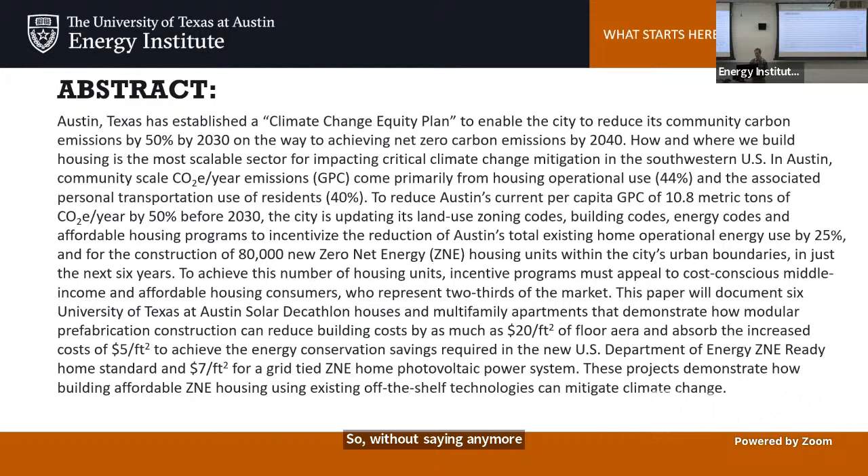Thank you, thank you. It's a pleasure to be here, and thank you for coming on a beautiful day. Let me figure out how to use this... clicking the screen first, maybe... okay, we'll just start.

To start with, I think everyone's seen the IPCC graphs showing there's a 99% chance that man-made carbon emissions have led to our current condition of dangerous climate change. The IPCC says that at the current rate we're going, we're not going to make the Paris Climate Accord goal of keeping the global temperature rise below 2 degrees Celsius by 2050. That's bad news—we're not making enough progress. We're making great progress in the United States and much of the Western world, but many developing countries are starting to industrialize, so the actual amount of carbon emitted into the air every year is increasing, not decreasing.

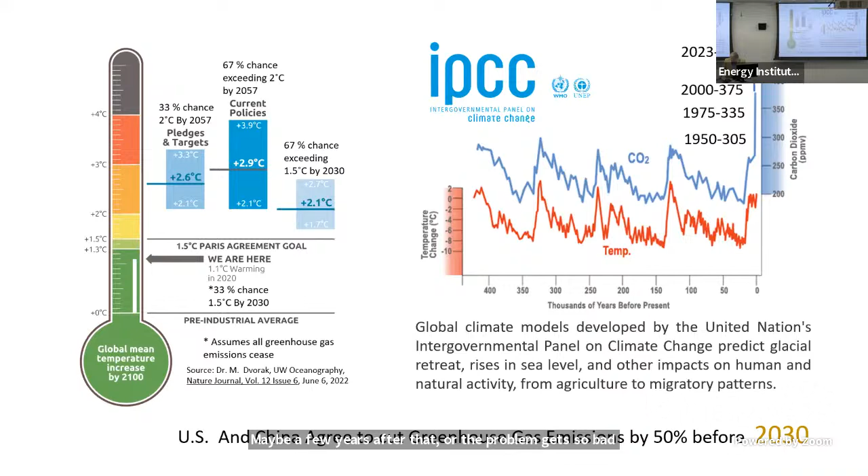So we have these problems. We may not make it by 2050 to stay under 2 degrees Celsius, but as Winston Churchill said, you can count on Americans to do the right thing after they've tried everything else. In that vein, we'll probably be looking at more like a 3 degree Celsius rise by 2050, or maybe a few years after that, before the problem gets so bad that we actually begin to do something about it. The implications of that are quite profound.

By that time we'd begin to see average summertime temperatures in Austin, Texas—currently about 96 degrees—rise to more like 110. We'd also see projected coastal flooding in some of our more beloved beach areas, like Port Aransas and Galveston.

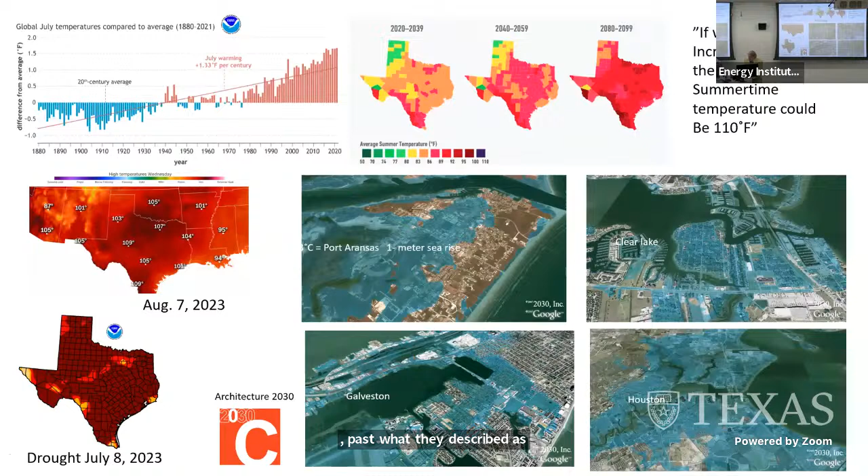To compensate for that, the City of Austin has passed what they describe as the Climate Equity Plan. This plan looks for Austin to become a zero net emissions community by 2040. We're a very rich, progressive, green, and highly educated city—if we can't lead the way, who can? Looking at their chart, we can already see we've made great progress, though a lot of that had to do with COVID.

So the average person in Austin is generating about 10.8 metric tons of carbon emissions per year. We can compare that to other locations. In Germany, that number is 9 and dropping. In France, it's 4. And for us to actually mitigate climate change, we would have to get that number down

to about 2.5, which is basically what you find in most of the countries in East Africa. So those are daunting goals. And to make a change of this magnitude, we would need lots of numbers. You can't just have 1 or 2 green buildings, 1 or 2 zero net energy buildings.

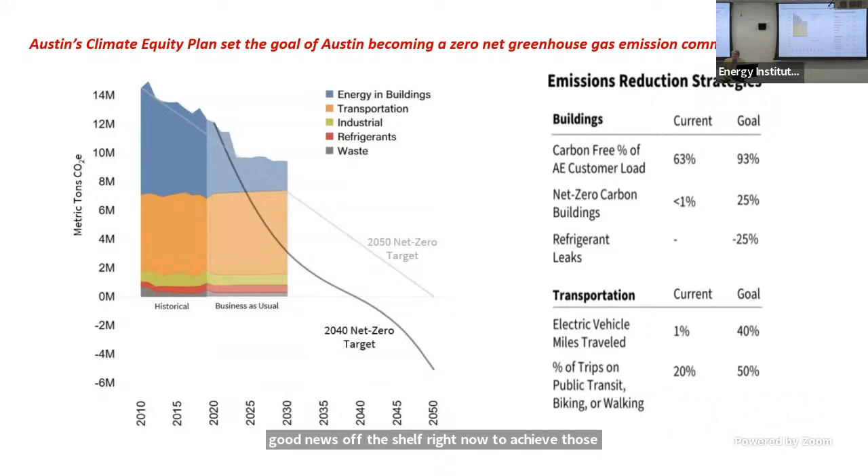That's the goal. That's a very ambitious goal. Some would say an impossible goal, given where we are. The good news is we have the technology off the shelf right now to achieve those goals. We don't have to invent anything new, we just have to have the wherewithal to do it.

The biggest thing to take away is to actually see where we're generating those carbon emissions here in Austin. It turns out 84% of it is basically a policy on where we build housing and how we build it.

84% of our carbon emissions come from the operational use of housing and the transportation associated with that housing. Suburban housing has more surface area than apartments, and we have, in terms of dwelling units, slightly more apartments than houses in Austin, but it's pretty close. We have about 467,000 housing units, and we're adding anywhere from 20 to 40,000 new units a year.

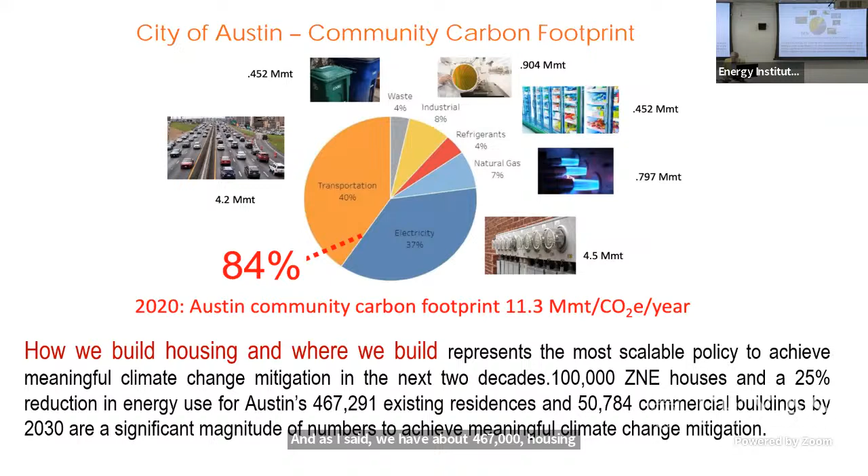So how do we do this? How do we go after this goal? Well, to actually get the numbers, you have to address the three legs of sustainability.

One, zero net energy. Turns out that's the easiest one to do. Just using off-the-shelf technology, we can do that. Making it affordable is the problem.

Because if we don't make it affordable, we don't reach the moderate and affordable housing market, which is two-thirds of the market. So what we have to do now is move this from the luxury market, where you might see a few zero net energy buildings, into the affordable and moderate income housing market. And then we have to make that compatible with existing neighborhoods so they will accept the number of multifamily units we're proposing to reach this zero net energy goal.

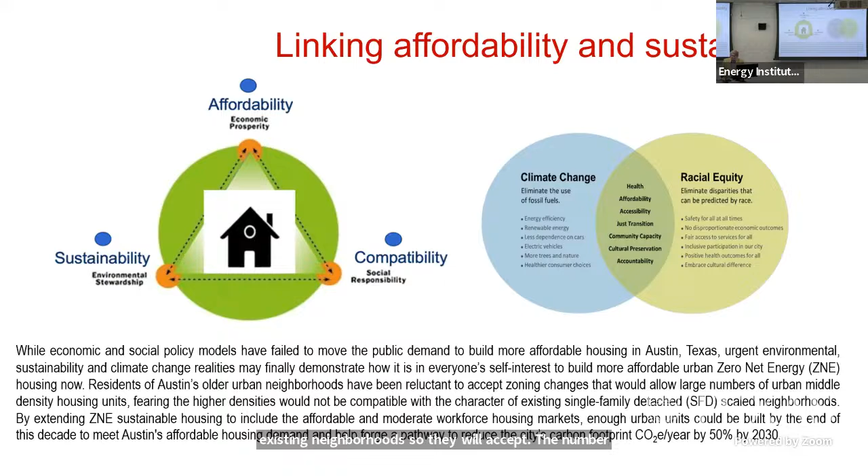Those are daunting tasks, so let's start with them. First of all, it's relatively easy to get to zero net energy, and the way you do that is to begin using the new EPA and DOE zero code. So we start with the energy code, the IECC, the International Energy Conservation Code.

And that sets the minimum R values for our walls and ceilings. It sets infiltration load, it sets the minimum U value for windows, these kinds of things. So that's code. To do Energy Star buildings, we're reducing that by about 45%.

So that's the first level. The second one is that we start making buildings much more airtight. Right now we're looking at maybe 4 air changes an hour in a typical residential building. That's pretty shoddy construction. We've got to get that down to somewhere around at least 1 air change per hour. So we're going to build buildings more airtight.

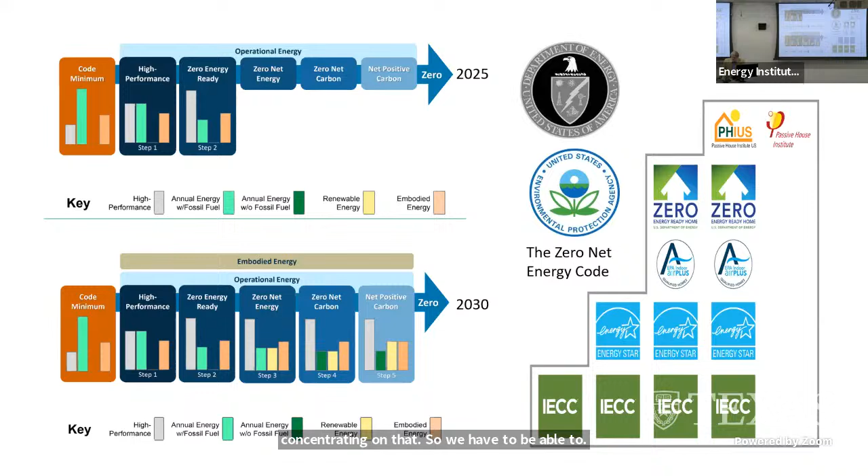And that's where we came in. So the first thing we looked at is prefabrication. Why are we building houses by hand, one by one, like we did 100 years ago? We're one of the last industries to actually industrialize, to be able to use some kind of prefabrication.

Over the years, we started in 2002. This was our first Solar Decathlon house on the National Mall. We did this in conjunction with the Center for Maximum Potential Building Systems. We built it here in Austin, took it apart and transported it to the Mall, had it in operation for a week, then took it down and brought it back to Austin, where it still exists.

So when we're looking at a project like this, we were not only zero net energy, we were trying to be annual water neutral. And we started looking at embodied carbon energy, which isn't being considered right now by very many people. But I would tell you, by 2050, half of the energy a building uses is in the embodied energy required to make the materials to build that building. So we have to address that.

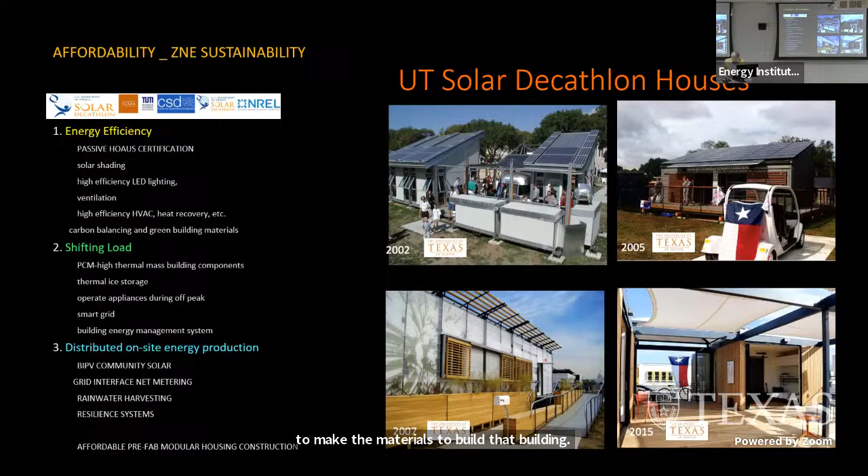We started out trying to do something like IKEA does, where we have a kit of parts that we would make and then assemble on the Mall through a series of, some assembly required.

So we were looking at trying to get some things recycled. We went and bought six recycled junk cars, basically, and took them to Seguin, Texas, had them made into light gauge steel. So there was some upcycling of that.

We also worked with the Airstream company to sort of redo their Airstream. We got one, completely gutted it, and rebuilt it from the inside out. That became our kitchen and bathroom for the project.

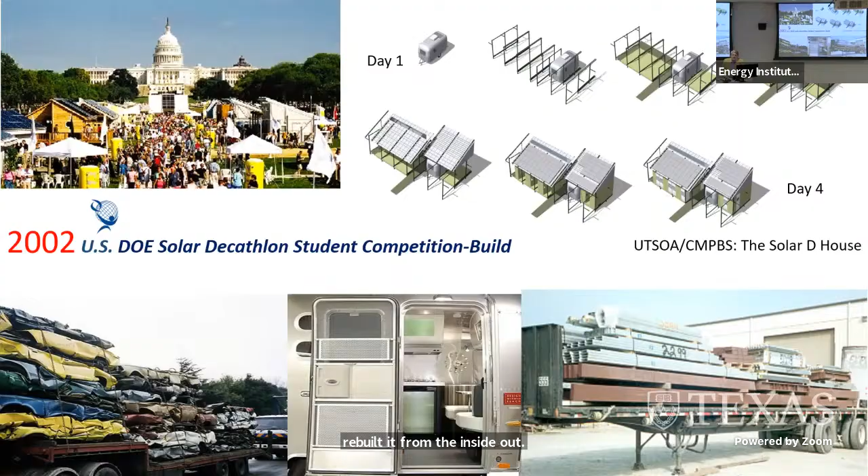And we couldn't use a crane on the Mall at the first competition, so we used the old Roman idea of a block and tackle, using unistruts to put things together, and then we'd use those to raise the roof up into place. You can see the students doing that here.

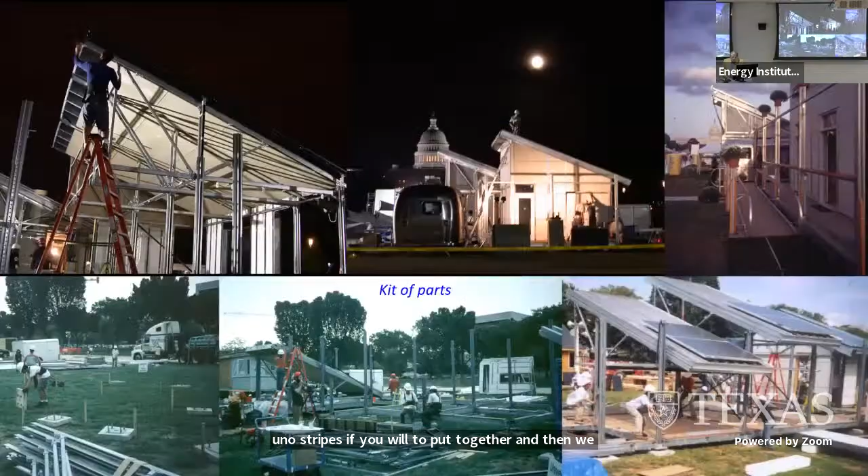So this is us on the Mall. You can see the boxes that we would bring off the truck, and then some assembly required. Yes, it took us like four days, day and night, working around the clock to get this thing together.

And when we finished, more people came through that project in the week we were there than attended the UT Oklahoma football game that year. So it's really highly interesting—the public's highly interested. In fact, the Solar Decathlon is the largest public relations event that the Department of Energy holds.

That's now worldwide. But in this case, we were looking at a 3.5 kW system. We tried to limit it to make it affordable. What you see in those white boxes are the water tanks—we have gray water, black water, and potable water.

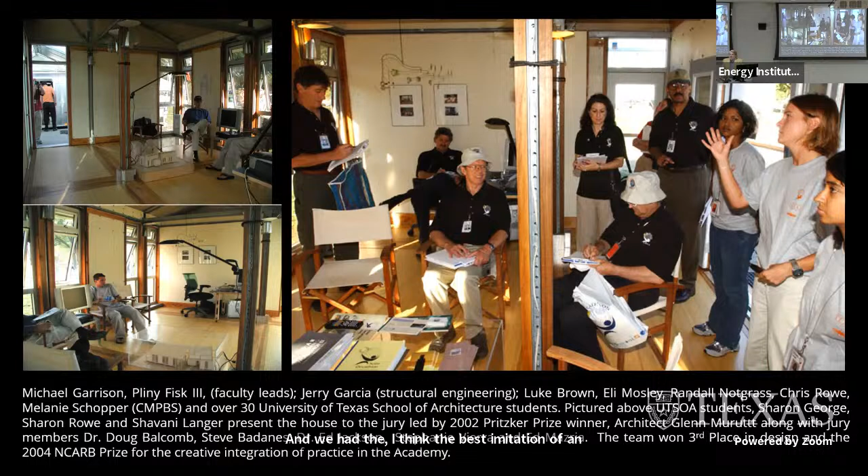And we had, I think, the best imitation of an engineer by an architect in our system. We were using a small fan coil unit with hot water from these evacuated tube hot water collectors, which were also acting as a shading device over our kitchen and bathroom area.

So we were great—we finished third in design in this competition, but there were problems. And this is talk about a tough jury: that's Glenn Murcutt, the Pritzker Prize-winning architect, Ed Mazria, Dr. Doug Balcomb, head of the Los Alamos Passive Solar Energy program, and Barry Jackson, head of AIA.

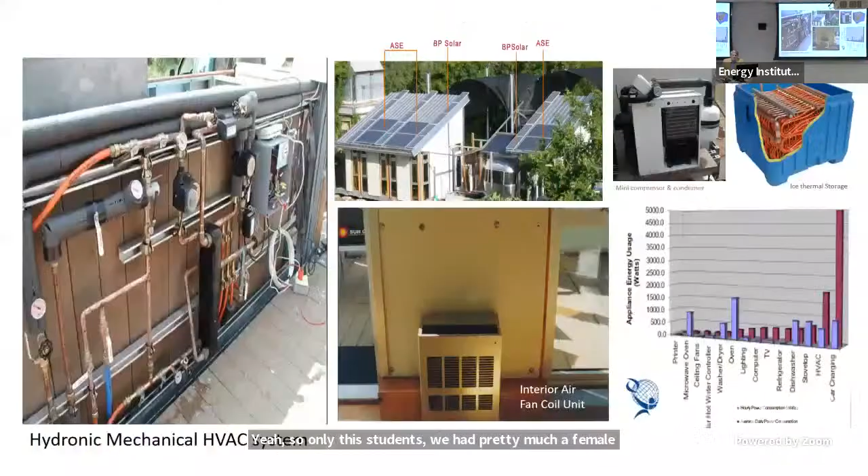Only the students, and we had pretty much a female team, were allowed to be in that review. And this is what I mean by the best imitation of an engineer by an architect—one of the things we discovered.

First of all, we had to get enough energy to also power an electric car to meet all of our needs, and we had to drive a certain amount of miles every day. So when you can see over here on the right, the energy being used by the electric car was way huge—that was our largest energy use.

And we also employed an ice battery with our mechanical system within this to try to shift the load a little bit. And then we had fan coil units where we're sending hot and chilled water to each one of the rooms that we have within the space.

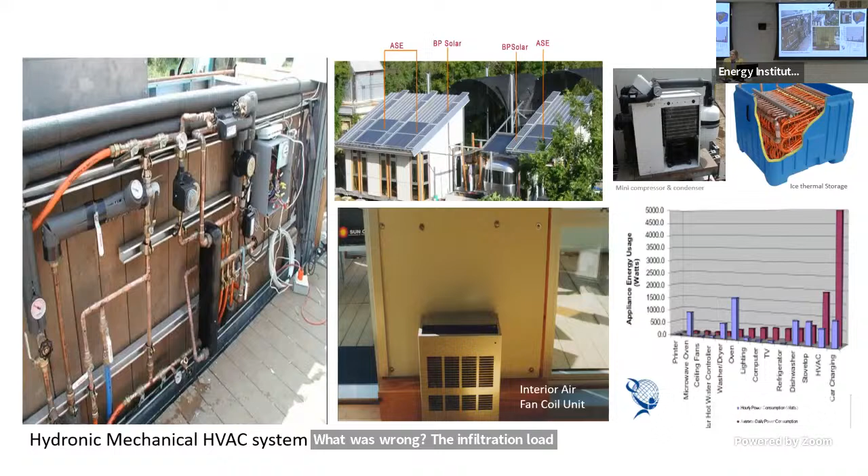What was wrong? The infiltration load was huge when you do it in kilowatts. So we actually could never get the load low enough to be able to make it zero net energy. And so that was a learning curve.

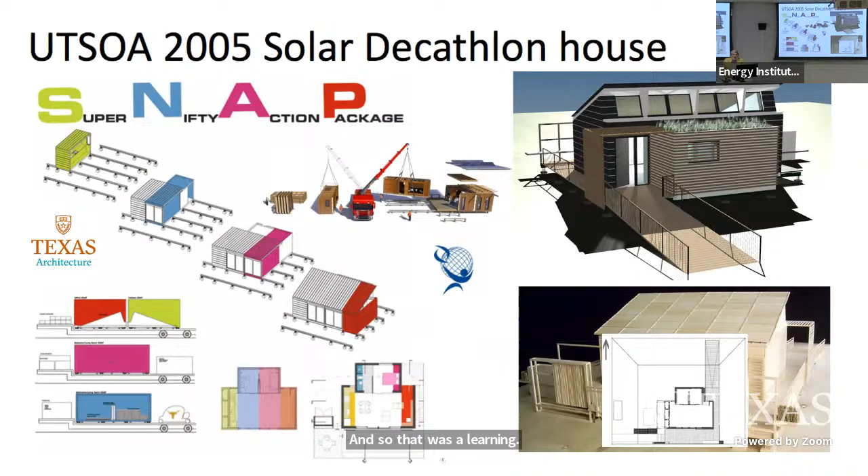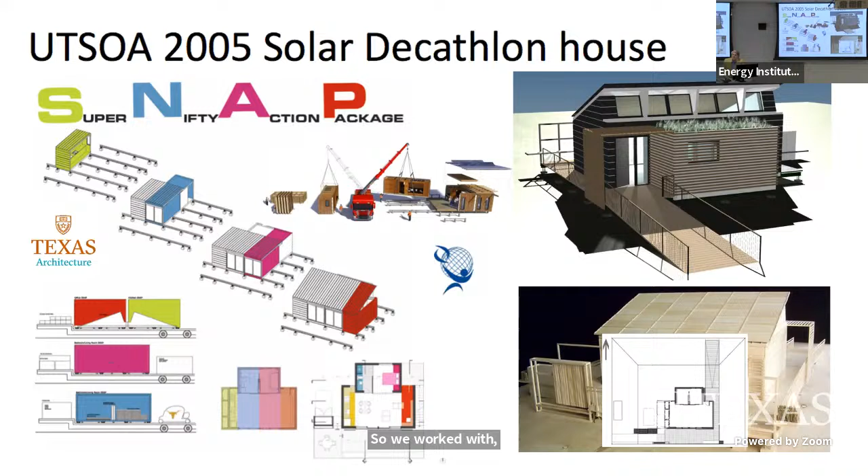In 2005, we did it again. And this time we decided to do fewer pieces, so we're allowed now to use a crane on the mall to do this. So we worked with Oak Creek Homes in Fort Worth, which is doing modular housing, and began to understand sort of like how you do chunks, as we call them.

And so this is all basically using SIPs, structural insulated panels, which were metal SIPs with a polystyrene core. And then we found that that doesn't meet the 1 hour fire rating. So we had to put furring strips and then put 2 layers of gypsum board on the front side of that so that we could get the fire rating, because if there's a fire inside, the styrene would have melted. And so you would have lost structural integrity.

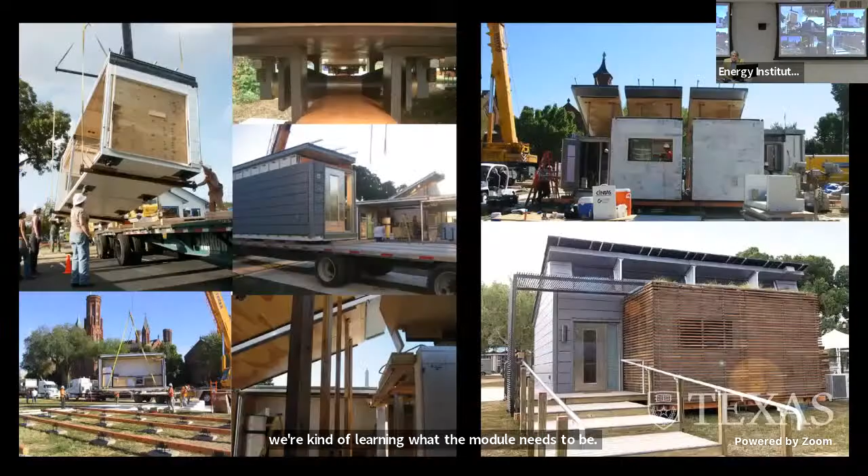So we're kind of learning what the module needs to be. This was put together in 4 chunks, each one of them 8.5 foot wide. So we brought them out to the mall and put them on a foundation frame, because you can't penetrate the ground on the National Mall.

It's sacred ground, so we had to invent a leveling foundation device. And we invented this, you can see it up on the upper left, using bowling ball technology, a way of taking these chunks off of the truck, putting it on the frames and rolling them into place and then snapping them together. So we call this the snap out.

We pushed the roof up and that became the main space. You're seeing the bedroom wing here on the lower right. And by the way, that's redwood on the outside as the rain screen.

But we didn't cut redwood trees down. That comes from a UT winery out in Fort Stockton that we went out and got the leftover redwood from their barrels, and we framed that in the shop and used that.

And then behind that, as the waterproofing layer, we went and got the Daily Texan aluminum sheets that they used to print the Daily Texan. I made those shingles that covered that. So we were trying to reuse materials wherever possible.

And the exterior on this, we were experimenting with zinc. So that's the exterior of the building.

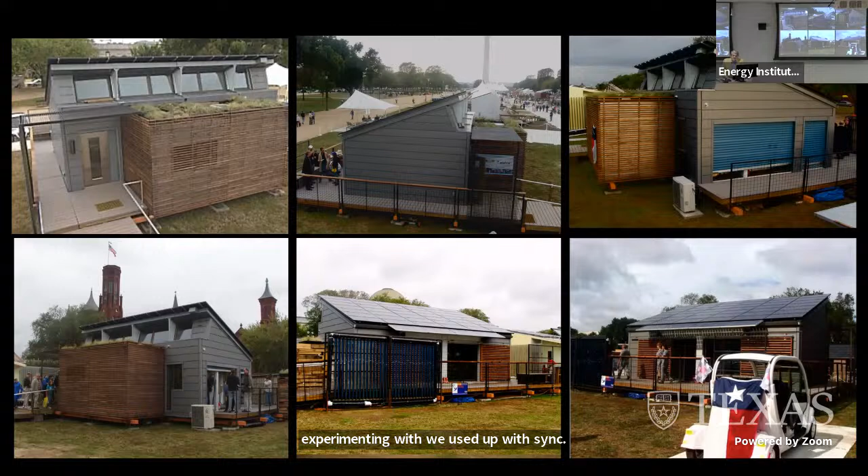The interior, we used mesquite, which is an underused resource here in Texas besides barbecue. There's 55 million acres of mesquite in Texas. So we were actually looking at using that type of system.

And we won a number of awards on our project. We won the BP Solar Award and we won the Hot Water Award. And so you can see we're kind of experimenting with what new technology is.

So this is bifacial solar collectors, which means the light will go right through them, so I can use them as shading devices. So that's our overhang.

The evacuated tube hot water collectors, you see we made it a wall. So we made it sort of like the entry wall, which you can see in the middle slide, where it doesn't have to sit up on the roof, because we needed all the roof for photovoltaics.

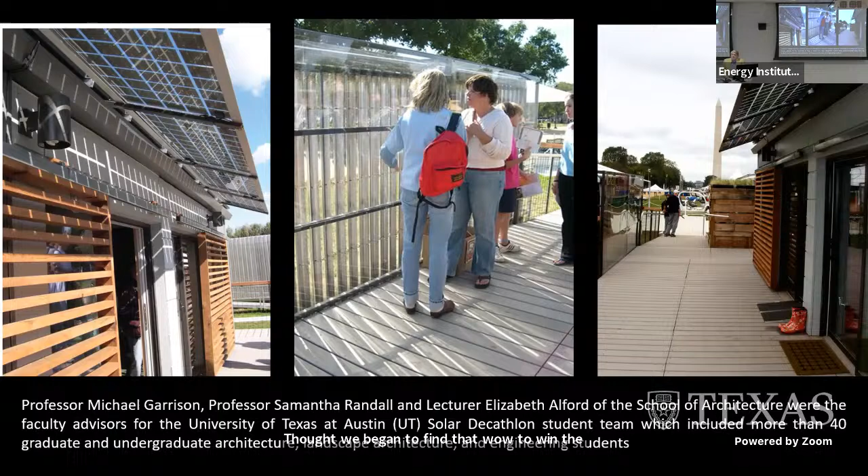We began to find that, wow, to win the competition, you need a bigger engine. So 3.5 got replaced by a 7.8 kW system within that. And so this was our system.

We had the ERV, we had a small air source heat pump, and all of those were able to be run by the collectors.

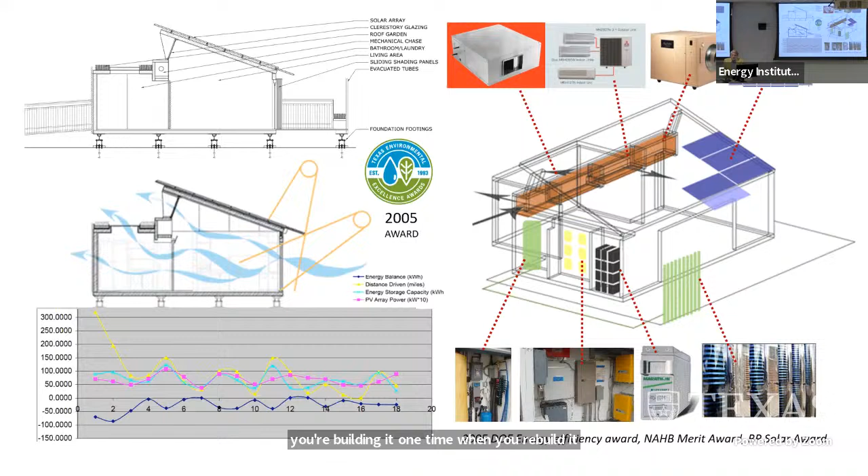We reduced the infiltration load, yes, but not enough. Still those joints—just because you're building it one time and when you rebuild it again, we did all kinds of sealing, neoprene sealing and all those particular joints, but that's still a very, very difficult joint to make.

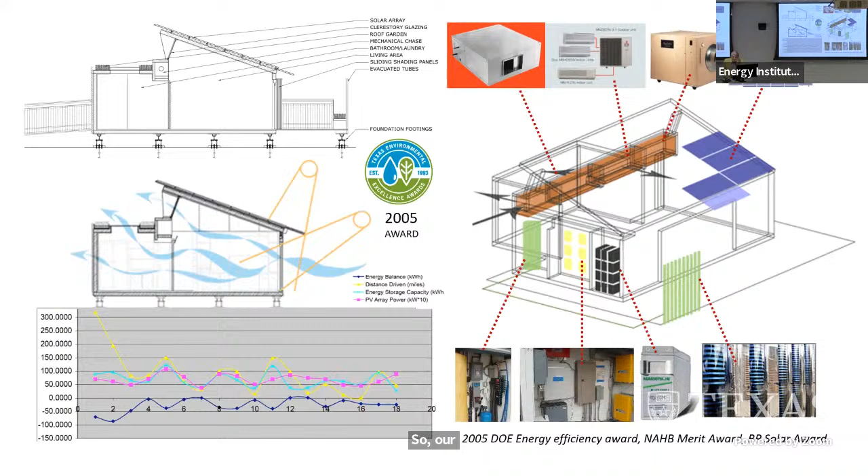While our performance was much better, we decided it just wasn't really good enough. So in 2007, we finally figured out that the way you do this is that you listen to the people at the modular home companies.

And we realized that we were asking them to make too many changes. So what we asked them to do now is to pretty much use their existing technology, the way that they build things. They build a house in a week, they finish it out in another week, which saves so much energy because a normal house is built in 90 days. That means I'm saving construction financing costs.

We have a higher quality of construction because it's being done in a factory instead of in the field. I have no rain days. Within that, I can buy in bulk, which all ended up meaning we got about a 15% reduction in cost over existing site-built buildings.

So we started working with Affordable and Palm Harbor Homes, which builds their buildings on a platform, a steel platform that they use to transport the building. We were able to get the cost way down, and now we're able to input the new costs of Passive House, R34 walls, R54, tighter construction, and build what we decided was a more energy efficient modular home.

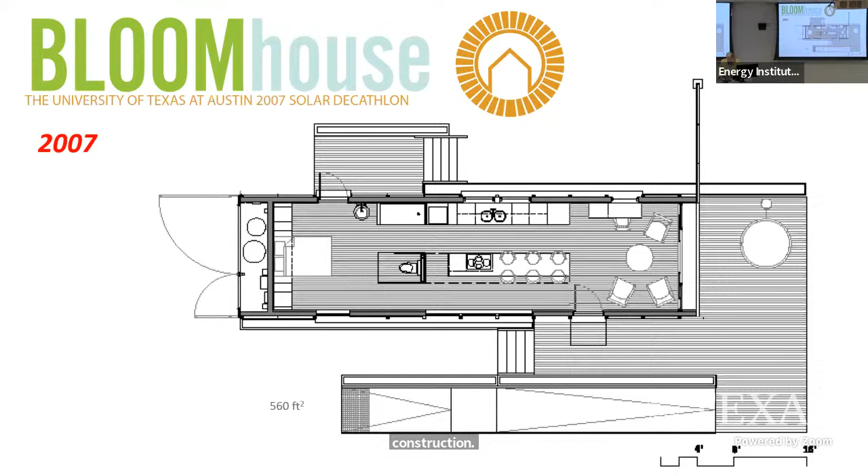So in 2007, we did that. This was out at Mueller, one of the old hangars. We used metal studs again in this case, and in about 9 weeks we put this whole thing together.

Some of the students were learning welding because we had to make our own chassis. In fact, one of the students who learned welding started an outdoor furniture company in Los Angeles, which now employs 25 people and has sales of about 54 million a year. So we started seeing students getting spinoffs from some of the work we were doing.

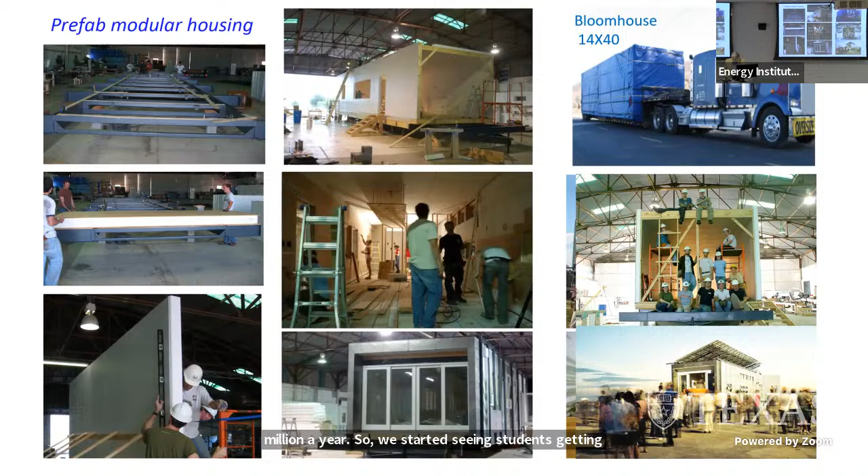So we put this house together over the summer, transported it up, and this is basically what it looks like. You can see the idea of having an open interior, which we wanted to do, as opposed to what you see in a typical modular home.

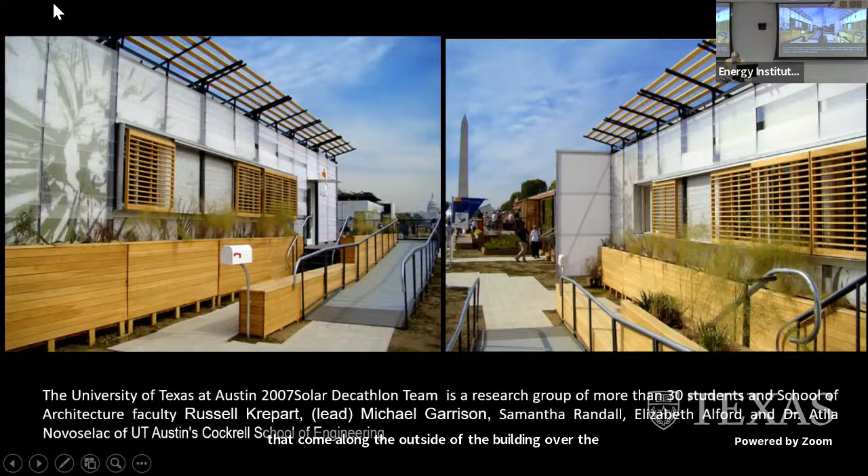We had no shear strength in that, so we built moment frames. A moment frame means we have steel frames that come along the outside of the building over the roof to give it lateral stability while still allowing us to have this open interior.

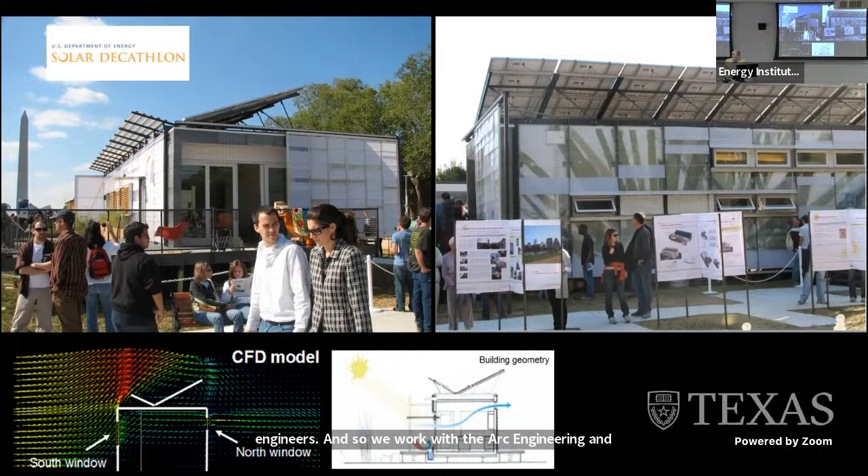So we got smart enough to start working with some engineers, and we worked with Arc Engineering, and Attila primarily was involved with us and really worked out the system with us. This is the interior of that project.

And when we finished this project, we brought it back to Austin. This is the interior of that. So we're using radiant heating within this, so we have what's called a warm board.

So we have more hot water capacity in this particular building. This is primarily some suggestions from Attila, that warm board is running water in it at about 84 degrees Fahrenheit.

We tried using it for cooling, but at 66 degrees we were below dew point, so we didn't do that anymore because we were getting condensation issues with it.

We also needed a dump for the hot water that we were generating, and so that's what the hot tub on the deck ended up being.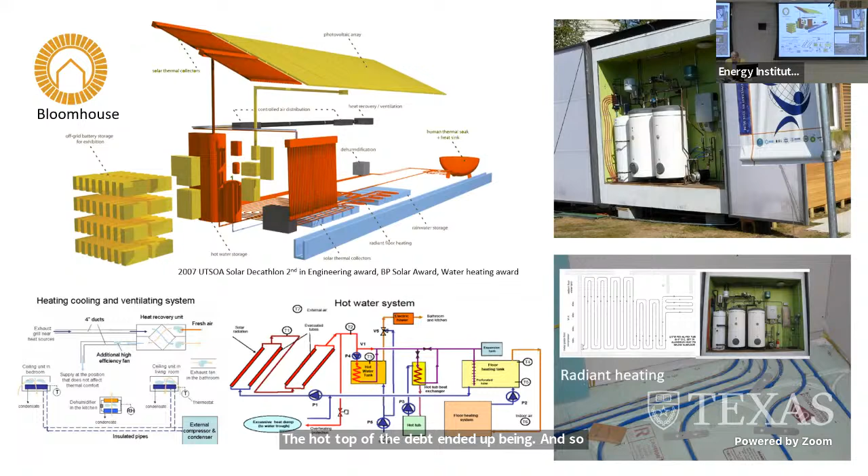So at the end of the life of this, we took this back out to West Texas, and it now exists at McDonald Observatory. It's a facility that's open for the staff. This was half Arch Engineering and half architecture students.

That, again, is our classic 7.8 kW system for that particular house. It sits right below the telescopes out on Mount Locke. The airtightness and energy efficiency of this meant we were zero net energy.

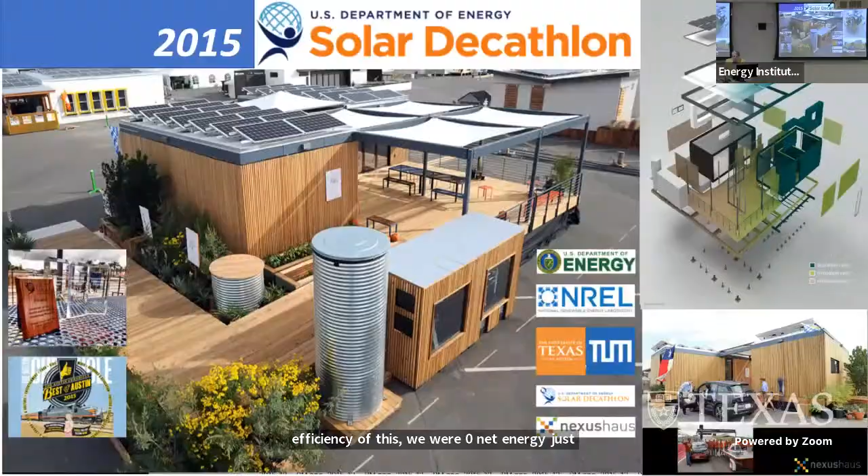So our last one, in 2015, we worked with Werner Lang from the Technical University of Munich. So we had a German-Austin engineering team. We worked with...

...some of the other people from mechanical engineering. We had a couple of PhD students from mechanical engineering. This was the building based on an old diagram, but primarily what we're starting to look at is embodied energy.

And that's why you see the abundance of wood on the exterior of the structure. All of that wood, to make it fire resistant, has been soaked in some borate solutions for quite a bit of time. So the building is really just a linear building.

It has bedrooms on one side, the living room and dining room on the other side, with an enclosed area that you can make as a sunroom, but it's a breezeway, a dog run, right through the middle of the building.

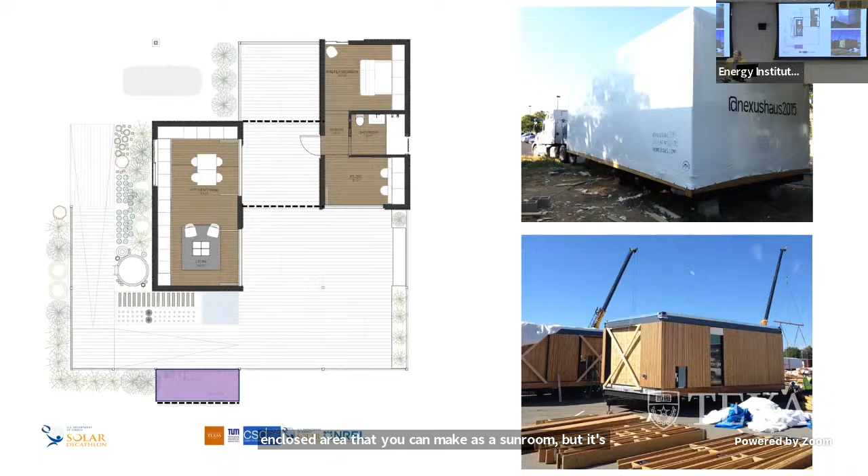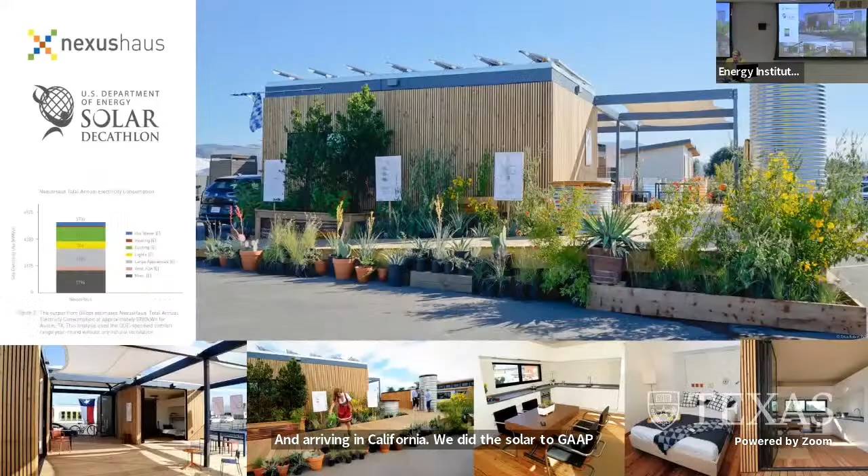You can see this was the truck leaving East Campus, where we built the house, and arriving in California, where we did the Solar Decathlon competition in Orange County. This is the project as it was finished in Orange County.

After we got the mechanical systems to sort of work, it ended up hitting the zero net energy scale. We really didn't have problems with that.

One of the criticisms we saw was that we have more surface area because we have two houses instead of one. We're doing that to enhance ventilation, which represents about 23% of the year here. So it's not like building in a northern climate where you want to minimize surface area. We want an energy efficient envelope, but we also wanted to take advantage of that 23% of the time when we could use outside air, outside ventilation, to solve that problem.

So we have this large deck on the exterior of the building, and this large shaded one. We're capturing all the water for the building, and again we're trying to use a whole series of reclaimed woods. That floor, for instance, came from some beams from an old cotton mill in East Texas. So again, you see a dominance of wood within this particular project.

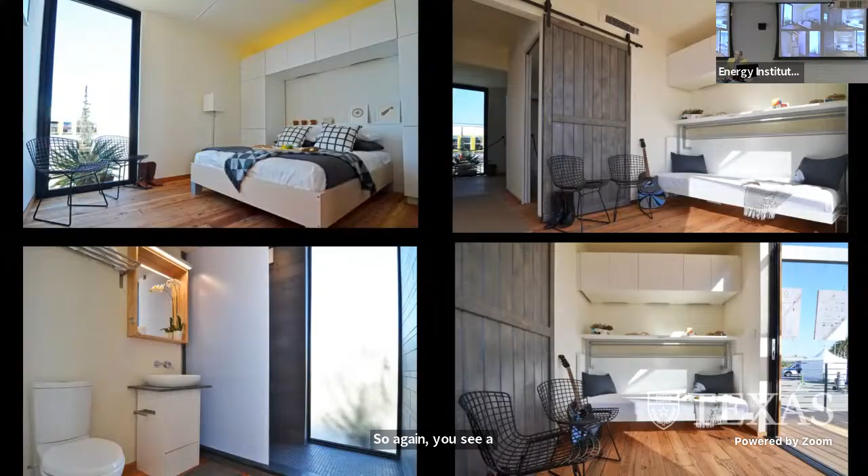The other thing you have to do within the competition is cook a meal for the judges. So we worked with some local permaculture folks here in Austin, and began to look at how we can incubate the garden using some of the water we're trying to clean, where you end up with a cycle of aquaculture, where the plants are being fed by the aquaculture, and the plants clean the water for the fish. We had tilapia fish that we were serving, and began to look at this: can you make food security for affordable housing in that particular area?

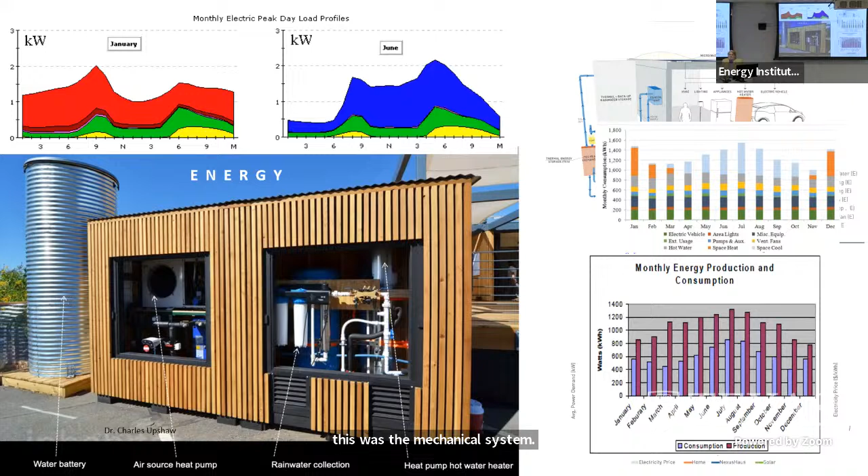This was the mechanical system. You see we've moved away from solar hot water heating and now using heat pump technology. So instead of trying to find more heat to make the solar water heaters more efficient, the heat pump technology for a hot water heater, which I think is coming out of the Oak Ridge lab work, is just so much more energy efficient than any solar water heater systems we could find.

We were also using a water battery in this case, instead of the ice battery. That's the tall column that you see on the left.

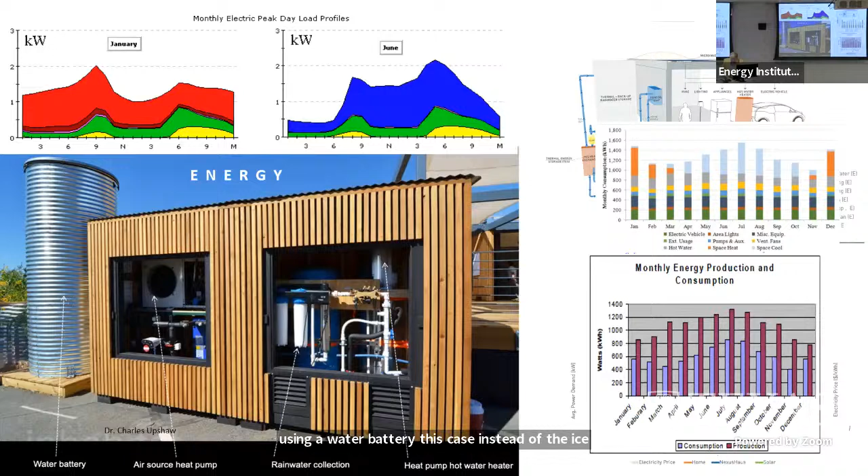Through these projects, we were able to document that it's possible to use off-the-shelf technology for zero net energy. And we were using the reduction in building costs, that sort of 15% reduction, to absorb the extra costs of using passive house conservation systems.

We were saving about anywhere from $17 to $20 a square foot, and we were increasing the cost of the building by somewhere around $12 to $14 a square foot for the extra conservation system. But that doesn't get us to zero net energy, does it? I guess it gets us to zero net energy ready.

So we had to put the PV panels on it, which cost us about $7 a square foot for a grid-tied system. So when we finish all that out, through our energy savings from the conservation side and our cost savings from the prefabrication, we're actually a little bit below market rate for these houses.

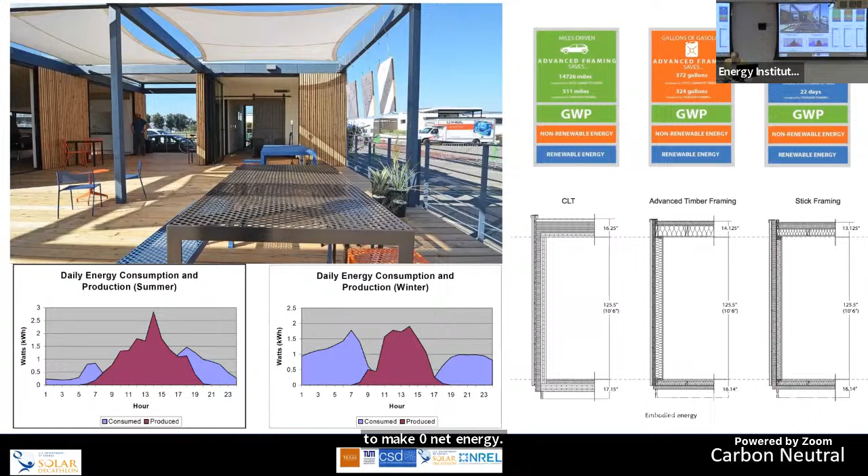So it's possible to do it. It's possible to make zero net energy below market rate, just using that kind of technology. And this is that project again, out at McDonald Observatory. If you want it, it's on the tour, you can go see it.

So that gave us the next problem. We can make it affordable, and we can make it zero net energy, but would the neighborhoods accept it? Is it compatible? You know about the fights we've had here in Austin trying to put new middle density housing within existing neighborhoods that don't want to see it because they believe it's against the character of their neighborhood that they've lived in all their lives. So we started working with the Blackland Neighborhood Association on the Solar Decathlon Challenge project, which is our fifth Solar Decathlon project.

We don't build it on the Challenge project, we actually just simulate it. So in this case, we went to the neighborhood and said, well, first of all, you need to respect us by looking at what we have, by looking at the character of what we have.

So we began to look at the bungalow houses built within the Blackland neighborhood. These used to be Swedish farmers, which were these tall, narrow buildings. Then in 1927, during the Jim Crow laws, when people of color were forced to live in East Austin, they ended up being filled with these bungalows, with these porches, because before air conditioning, people would come out onto the porch after dinner to take advantage of the breezes.

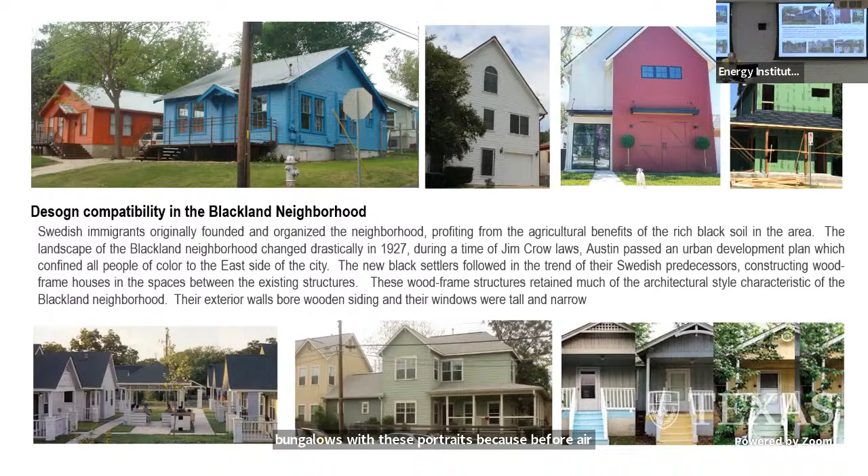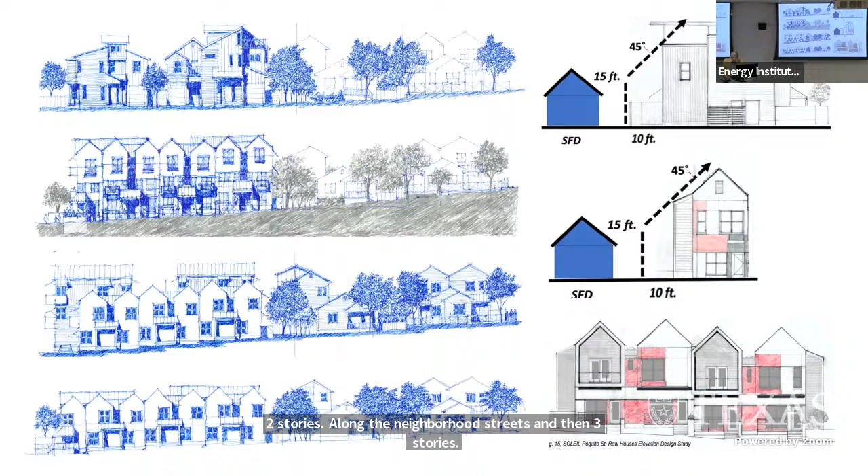So they were very proud of their buildings, and we began to work with them, producing sketches about density, setbacks, and what's called the building tent. We ended up coming up with designs they could live with—basically row houses limited to 2 stories along the neighborhood streets, and then 3 stories behind those 2-story row houses. That was what they thought was compatible.

So this helped us with the cost per unit. Instead of looking at a density of 1 unit per lot, something like around 7 units per acre—which is what single family detached gives you—we started looking at about 30 units per acre as a compromise.

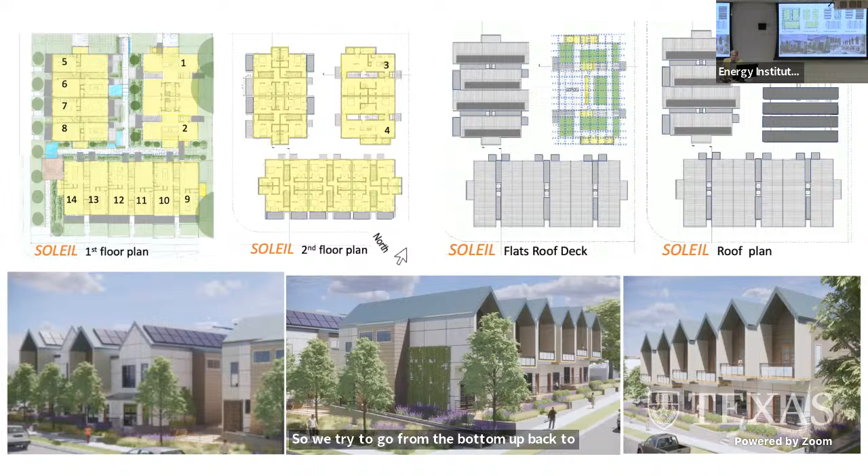As you well know, the density being proposed by CodeNEXT and some of those was all the way up to around 60 units per acre, 45 to 60 units per acre. So we tried to work from the bottom up back to the city: what can the neighborhoods live with? These row house designs became something they thought they could live with, that would maintain the character of the neighborhood, be more compatible, and more socially equitable.

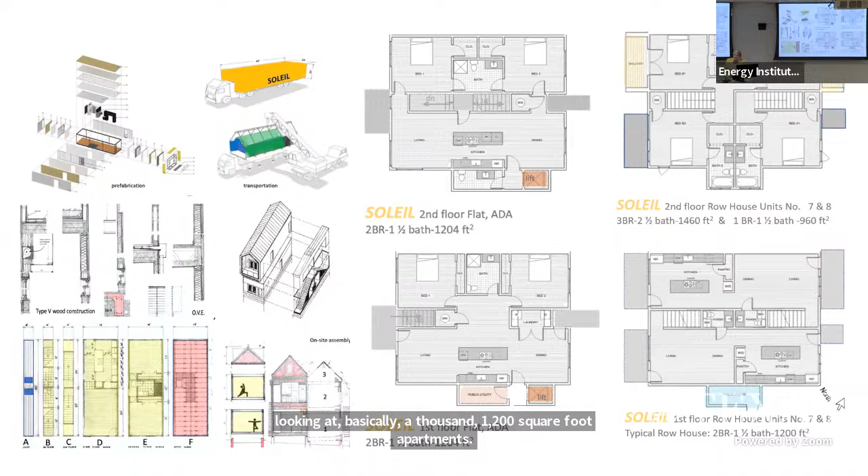So again, we looked at prefabricating these. We were looking at basically 1,000 square foot and 1,200 square foot apartments, where 20% of them would be ADA available, and putting those onto the lot. On the neighborhood streets we have the 2-story row houses, and in the back there's a 3-story building with accessory dwelling units that are ADA and have a roof deck on top, which are covered with PVs.

We ended up finding that because of the efficiency we were working with, we were able to get our PV sizing system down to about 3.5 kW per unit. And because we now have 14 units sharing the land that used to be occupied by 2 houses, we're making it more affordable in terms of the land cost.

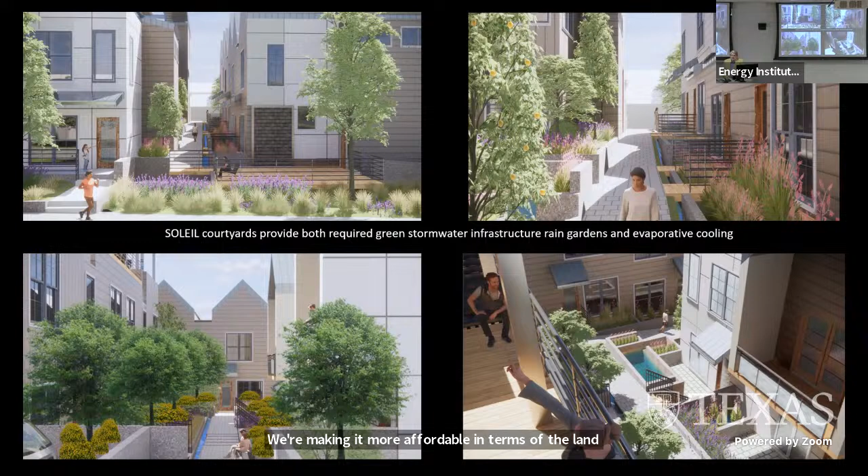You have to do some things when you're doing that—you have to include the stormwater runoff. The infrastructure that exists right now means you can't just increase density without affecting the infrastructure, so you have to put in what's called green stormwater infrastructure. That's what you see in the courtyards that are actually holding water. The current runoff on the site, we hold that water for 48 hours and then release it slowly so you don't create more flooding within the site.

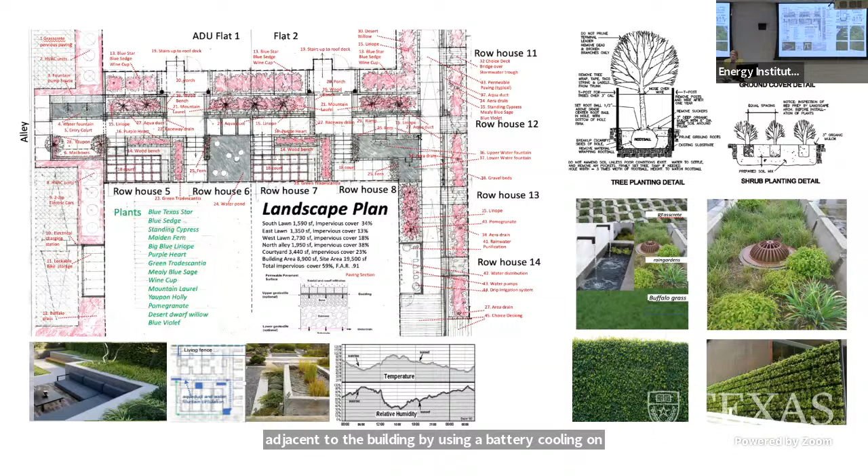We're also using that to change the solar heated air adjacent to the building by using evaporative cooling on the outside of the building, which can reduce the temperature some 8 to 13 degrees Fahrenheit by using rain gardens adjacent to the building.

We're also harvesting the rainwater from the PV panels on the roof of the building and from the Galvalume roofs of the building, and storing it in water bladders. So we don't have these big cisterns on the site—the water bladders are in the 2-foot crawl space under the building.

Because we're building these buildings off-site and bringing them onto the site, the concrete slabs have a tremendous amount of embodied energy, so we only have a concrete perimeter beam with a 2-foot crawl space under that. That reduces the amount of concrete and steel in that particular beam, and that becomes a place for our water, so we're able to use all of the water we're collecting.

We're not using it for drinking purposes or any potable water sources, which is illegal in Austin right now. What we're doing is using it for irrigation primarily. So we're able to keep all of the rain gardens and landscape watered, which is our biggest use of water in Austin—irrigation.

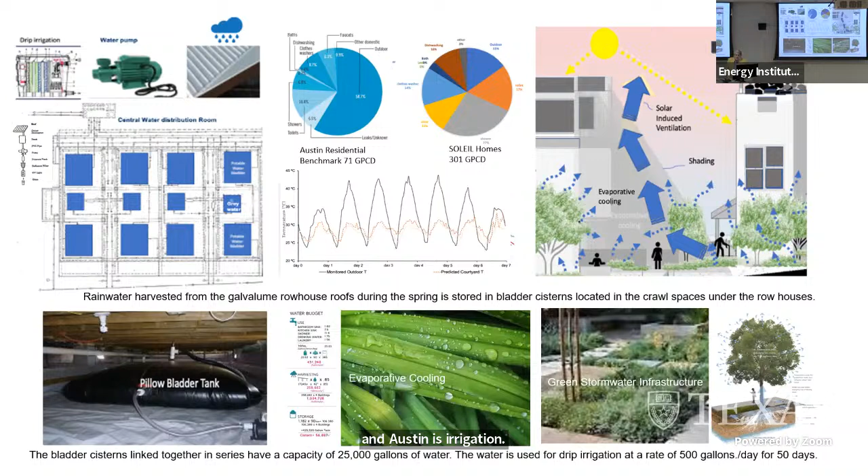And so we were able to reduce that particular water use. We were able to add this roof deck on the 3rd floor above the ADA units, which has an outdoor kitchen.

As you can see, the whole trick when you're looking at zero net energy is you're collecting much more energy during the day, running your meter backwards on net metering, and then pulling that energy back out at night. Because the big use of this one is not during the day, it's really a big nighttime use. We're actually dropping the EUI, the energy use intensity of the building, through the passive house approach to make that happen.

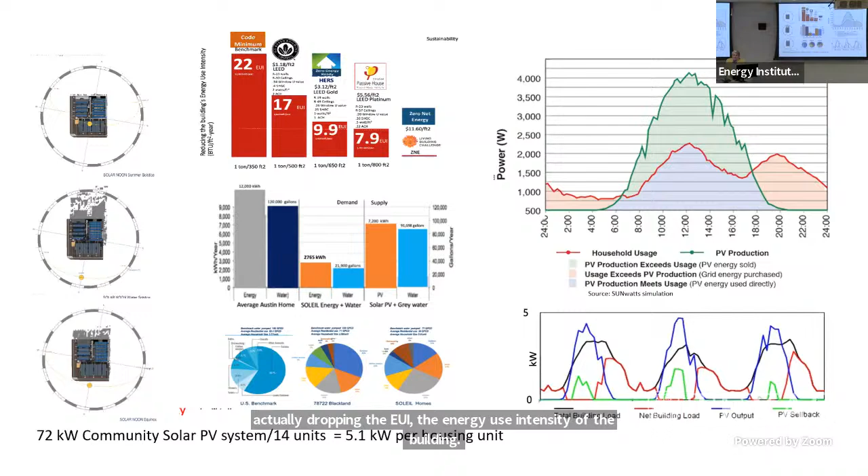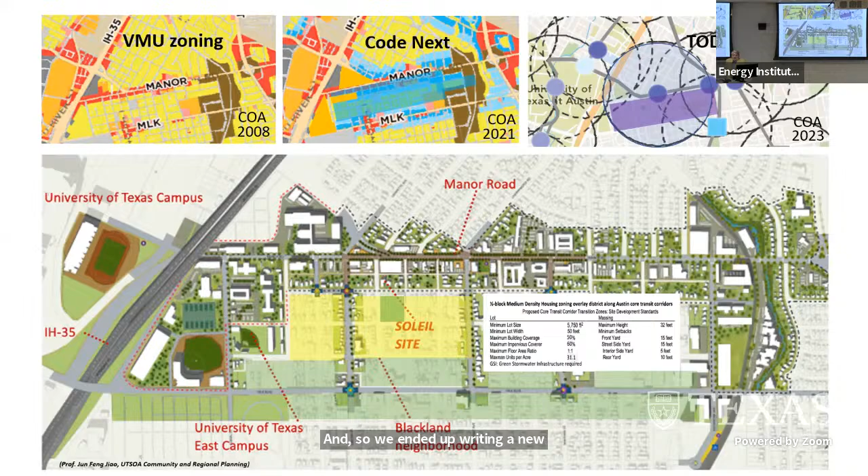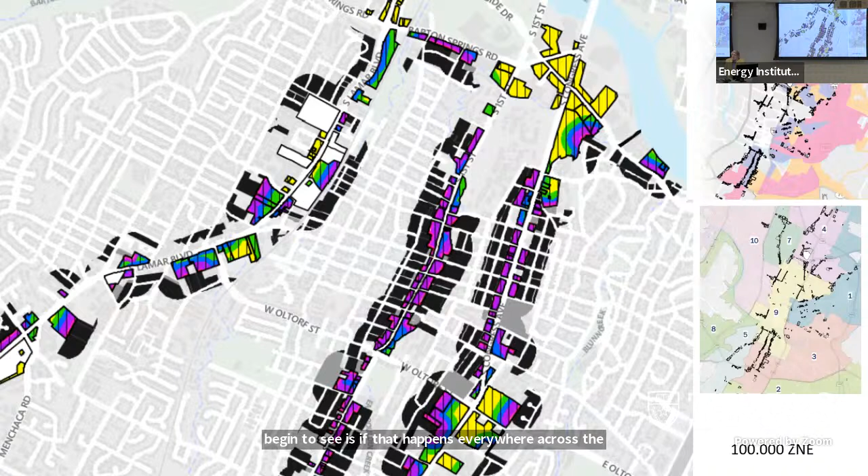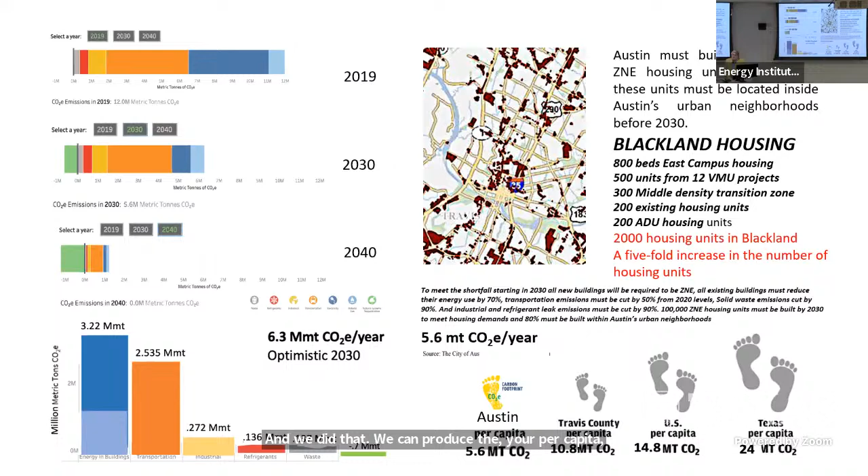So we ended up writing a new code for the transition zones within the neighborhood, hopefully to make that compatible. And what we begin to see is if that happens everywhere across the city, yes, we can make the 100,000 new homes. But we have to do it in big numbers to be able to do that. And if we do that, we can reduce your per capita footprint from 10.8 down to 5.6 by 2030. That's sort of a pathway to that.

The last thing I'll show you is what we're doing right now. This is our latest solar decathlon challenge, and we're taking on student housing. That's again about 20% of that 100,000 units that we need to build. It's going to be student housing, and by building new dorms, we can free up a lot of affordable housing, a lot of apartments in Austin for other folks.

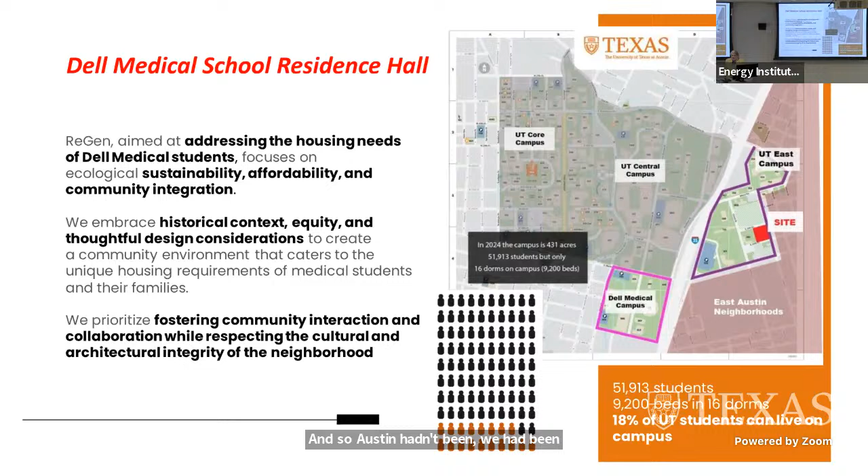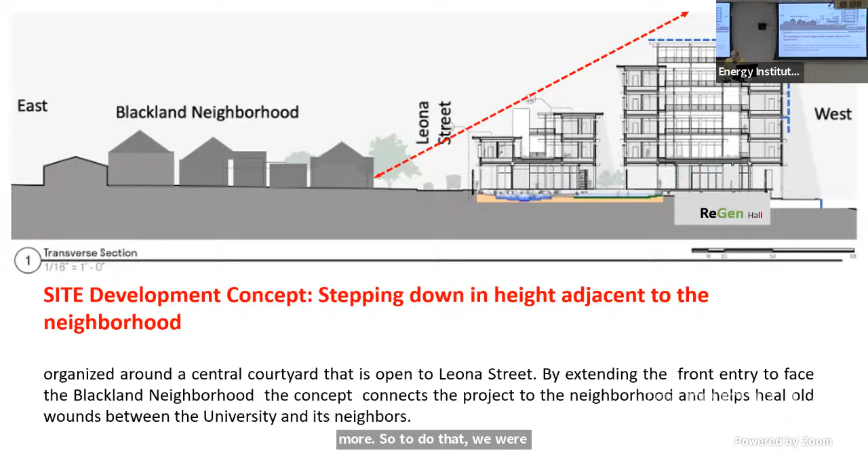To do that, we were working with the Blackland neighborhood and terraced the building back down. This is the proposal that the students did, and it's all based on this being for medical students. The way that they do this is they sort of teach themselves almost.

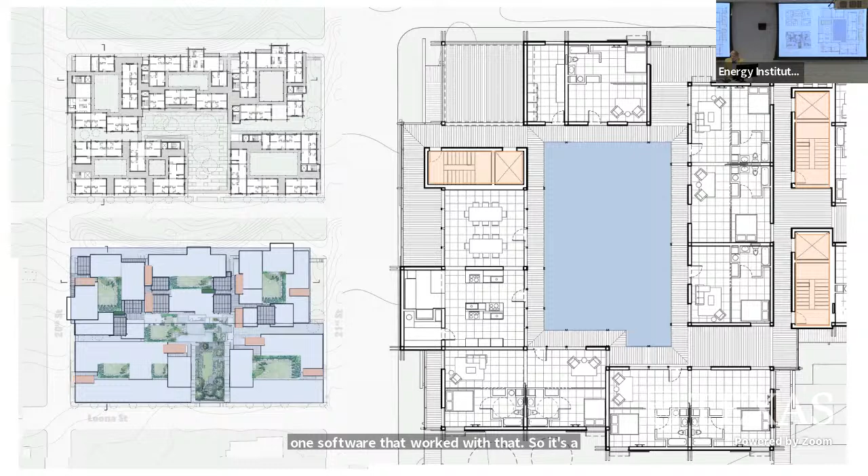They form a team, a pod, and they have one doctor and one proctor that works with that pod. So it's a 24-hour deal. It's a co-op. They have one kitchen, one laundry for the apartments that front this open courtyard, and they actually have classes in the dining room at night. That's the study hall. There's a clinic on the first floor, a people's clinic, a free clinic for East Austin.

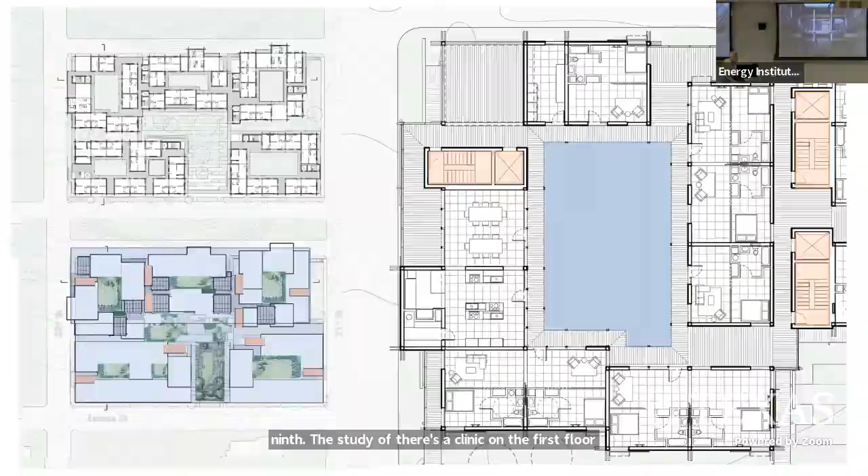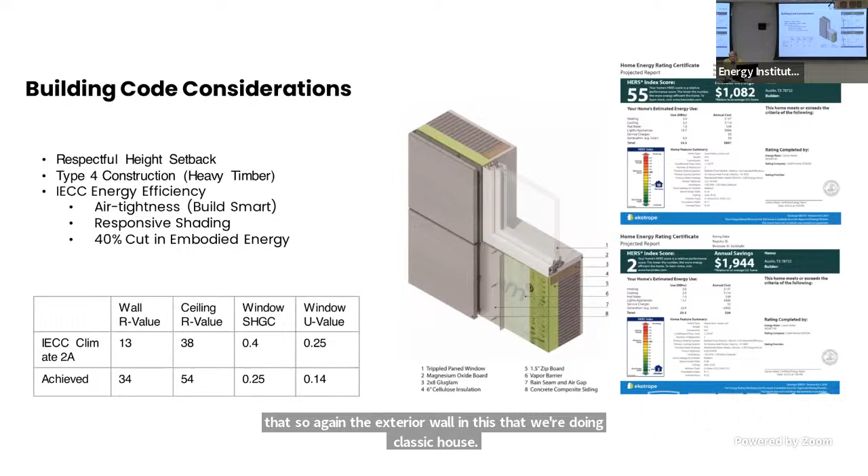Part of the nursing—this is the light well. Within that, the exterior wall is where we're doing the passive house approach. Here you can see that envelope where we're getting the HERS index from 55 down to 2, based on the prefabrication of how these particular projects will be built.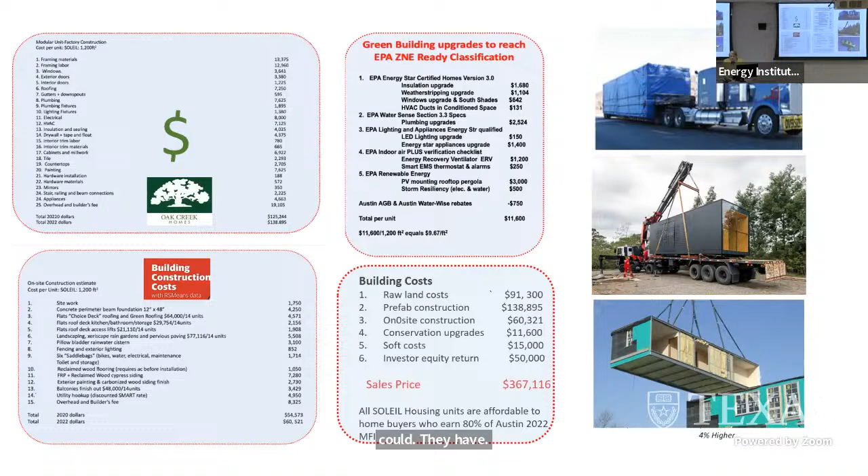We actually get into costs. We're looking at about $161 a square foot, which is about $40 a square foot cheaper than what they normally build graduate student housing for. And we're going to add about $12 a square foot for the new energy conservation and water conservation features. So we're going to be pretty much zero on an annual basis.

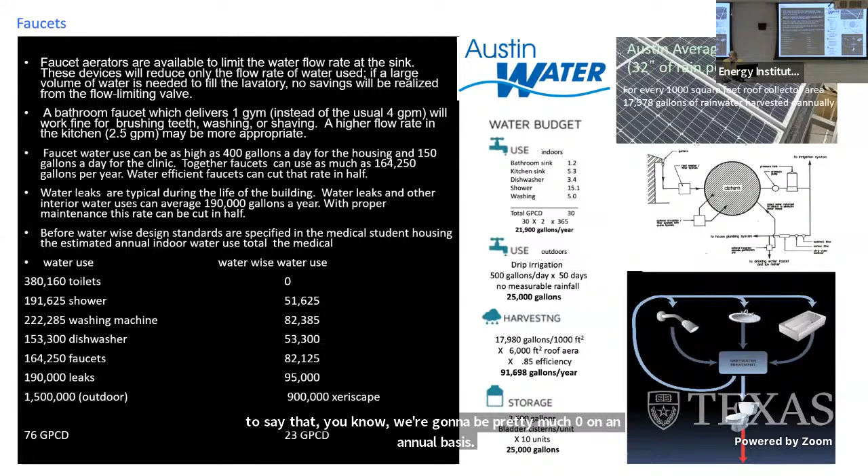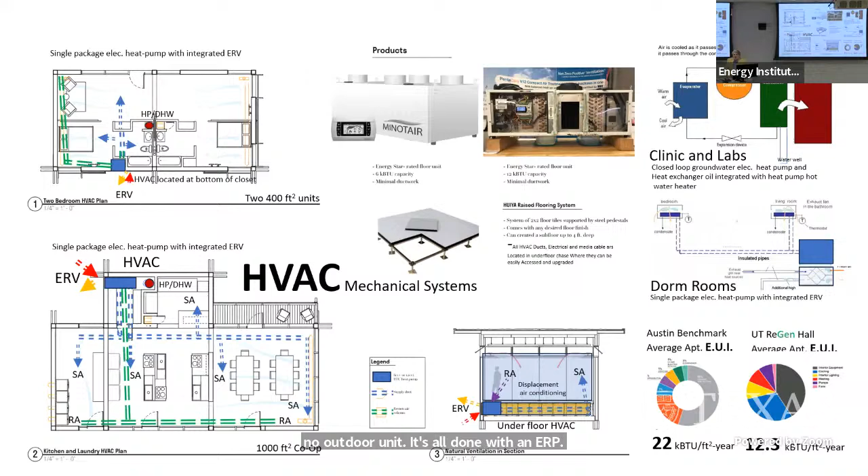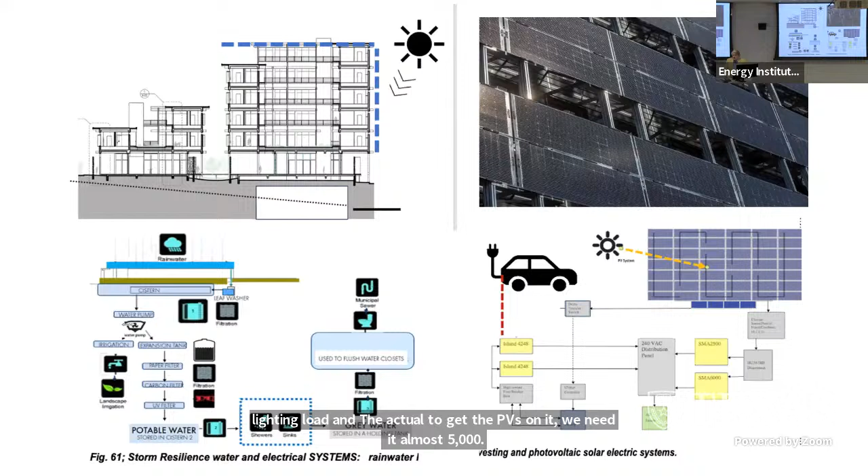We're going to use the rainwater for flushing the water closets, which saves a big 30,000 gallons a month. The HVAC system is this new mechanical idea where there's no outdoor unit—it's all done with an ERV and an air source heat pump working together. So we have a 6,000 BTUH in each one of these particular units. For the lighting load and to get the PVs on it, we needed almost 5,000 square feet of PV panels, on the west wall facing the women's softball stadium.

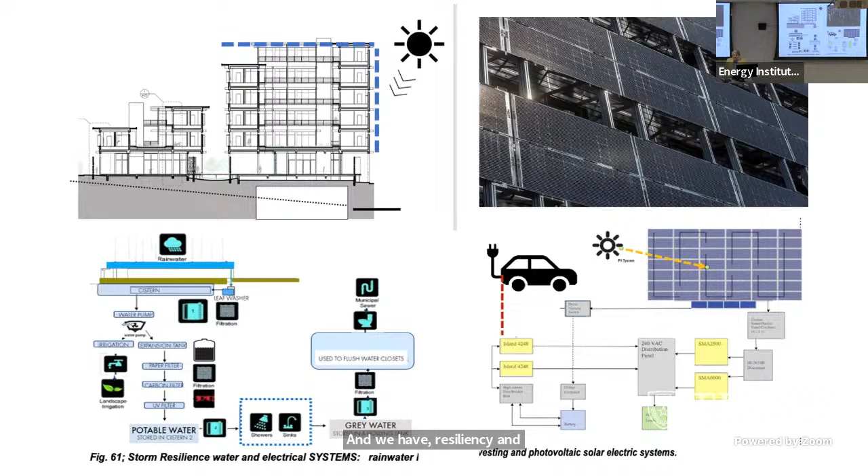And we have resiliency in water and resiliency in power, which we have to have for the clinic. Just to finish with this, this is the bottom line of what we're coming to. You see in yellow here, that's the embodied energy, the energy required to build the materials for the project. So there's an initial big hit, something in the neighborhood around 400 kilograms of CO2 per square meter. That's just the initial one. Whereas what you're seeing in red would be the benchmark—that's like the code standard.

What you see in the blue below would be Zero Net Energy Ready. And we're doing even one that's a Passive House, which is the dark one.

If we can do that, we have another upgrade of maintenance in 15 years, because using these DX units, we have to replace them all in 15 years. And in 30 years, we're going to have to replace all the windows because there's going to be obsolete technology. We're going to have to replace all the HVAC. All of that has to be replaced. So that's all adds to the embodied energy.

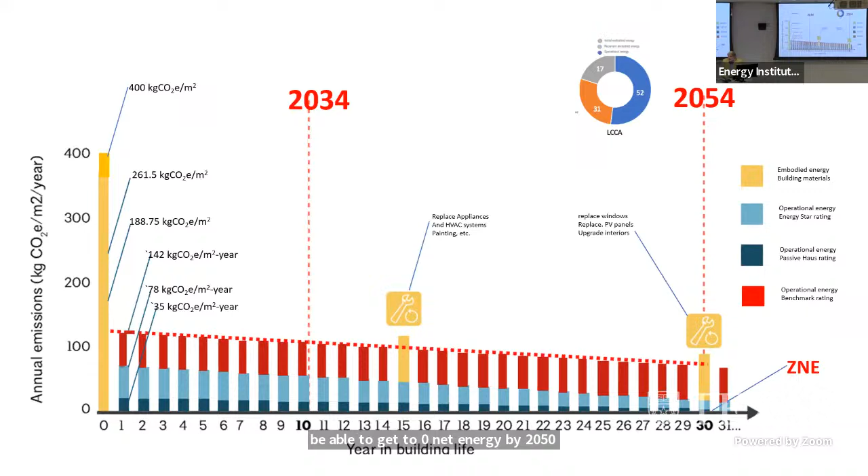Between now and 2050, half of the energy that we're going to use is embodied energy, not just operational energy. So we had to absorb that cost into it as well to be able to get to zero net energy by 2050. And that's an ambitious goal, but it's possible and preferable.